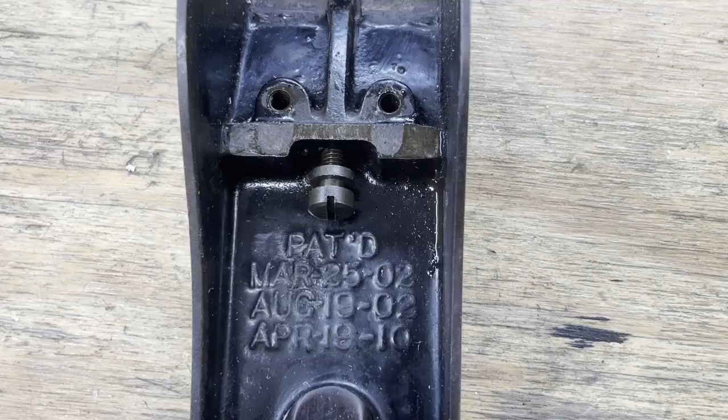But it's a Type 11 because there are 3 patent dates back here, and that narrows it down to a Type 11 or Type 12, but the 12s have the large depth adjustment knob and the high knob in the front. And those two changes came somewhere in the middle, the Type 11 to Type 12 transition.

But typically those planes would have had the V trademark back here. So again, where this is an earlier trademark, I think this is a genuine Type 11, and my suspicion is an early one. Decided to refurbish this plane, and that turned out to be quite a project. So I'm going to break this up into a series of 3 videos.

This particular video, I'm just going to do a deep dive to show you exactly what the plane is and what Stanley tools of this vintage had and didn't have. So enjoy. In the other videos, I'm going to show you how I went about completing the refurbish. And in another video, I'll focus on refurbishing and repairing the knob and the tote. So let's get to it.

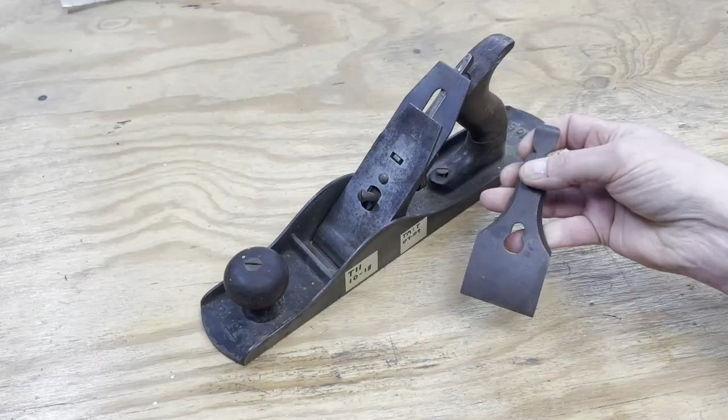So very quickly, just to take it apart, the lever cap has a fair amount of surface rust on it and an intense patina. That's going to need a little bit of oil to free it up. And the iron and chip breaker, looks like there's been a fair amount taken off of the iron, but generally they look good. And let's see if I can catch the light for you to show you that trademark. There it is, Stanley Rule and Level Company.

And inside here, the screws holding the frog down look to be in pretty good shape. The lever seems pretty snug, which is nice. And the Y yoke looks nice. But this screw has been replaced. I hope that screw didn't muck up the threads in the casting. Well, that's something I'm going to have to try to figure out how to deal with.

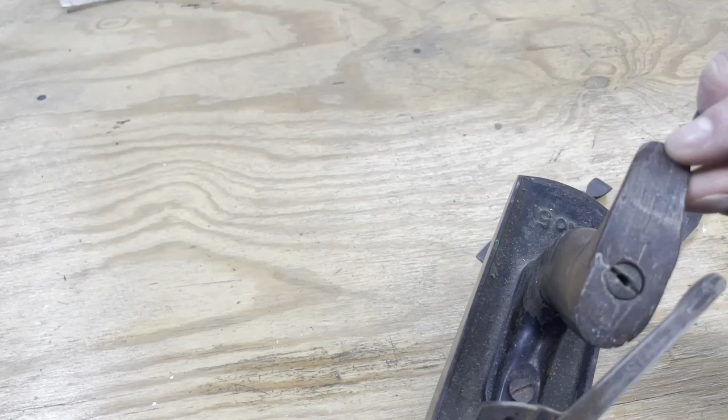And you can clearly see the tote is broken here. And there's a good chunk taken out of the horn section here. The brass nut over here looks like it's been chowdered a bit, although that one looks pretty gosh darn clean. I also noticed that the knob and the tote, I don't know how well it'll show up, but there appears to be something like a shellac or a polyurethane that's flaking off there, and you can kind of see it. And maybe it's just a discoloration, but I think I'm going to try to get that off.

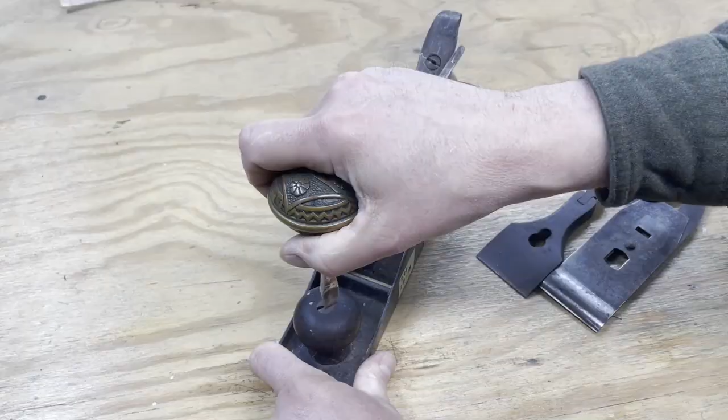And again, this particular vintage, it does have the frog adjustment mechanism and the small depth adjustment knob. All right, gonna see if we can, well, that's on there tight. Okay, very nice. Looks like this is coming loose without too much of a fight. Very nice. Oh, I'm a little surprised.

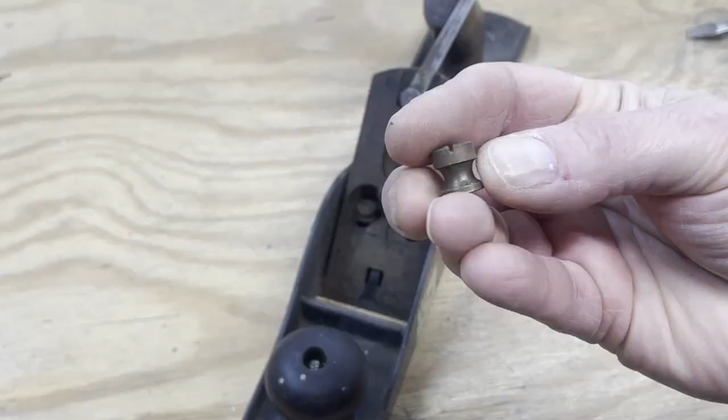This has a waist on the nut. That strikes me as a feature of a later model. And again, there's the obligatory few paint splatters, but boy, there's no cracks or checks. That's a beautiful knob. Just needs to be cleaned up a little bit. Oh, look at that. That one comes out. Very nice. And those threads look very good.

I often soak these threads before I try loosening them. But let's just see. Oh, that's nice. That wasn't very tight. And that one is pretty tight. Came loose.

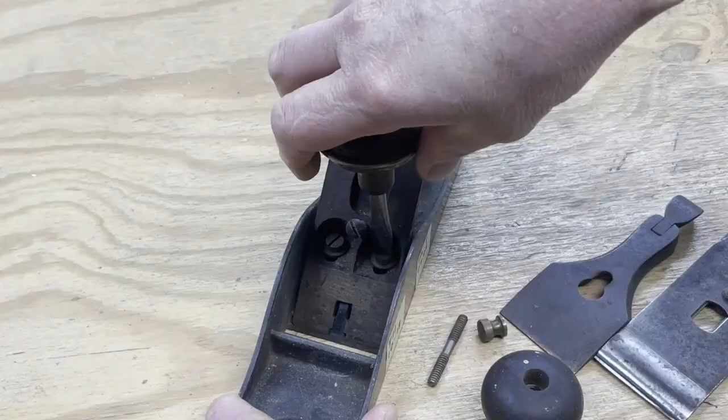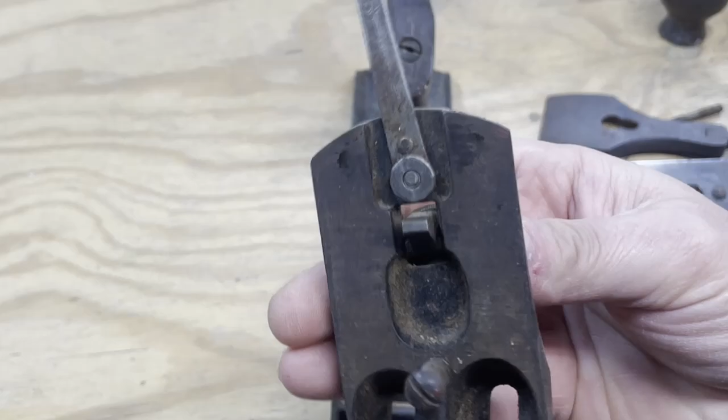Alright. Again, these two screws look pretty rusty, but no chowdering on them, which is a pleasant surprise. And a closer look at the frog. Awful lot of dust and dirt on it, but it looks as though the japanning is still up here, so that's a pleasant surprise. Yeah. This bad boy might be in better shape than I thought it was.

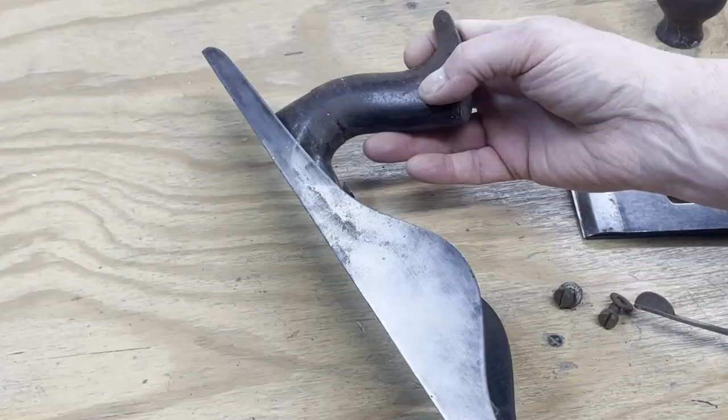Looks like somebody took some steel wool to try to shine that a little bit. And I noticed the same thing on the side of the plane. Looks like somebody gave it the obligatory steel wool cleanup, but didn't bother to get any of the dirt or grime off of the japanning.

Take the screw out, a fair amount of grime on it, a little bit of friction back here. Knob actually looks in pretty good shape. Okay. Here's the knob, looking pretty good. Yeah, it's going to take a little more work. Oh, look at that. This is a solid nut, so we don't have matching nuts on the furniture. And boy, that one's pretty chowdered up.

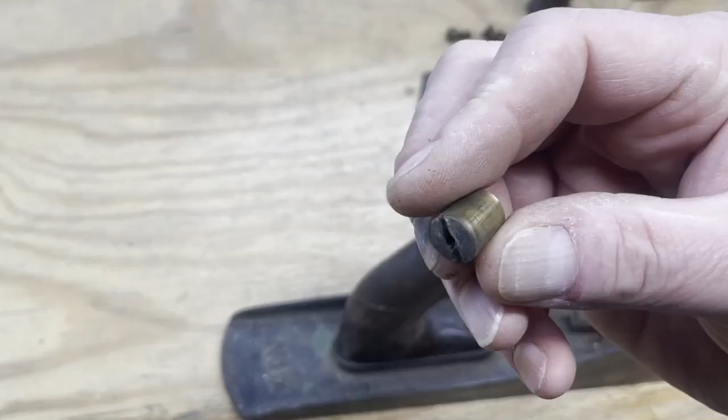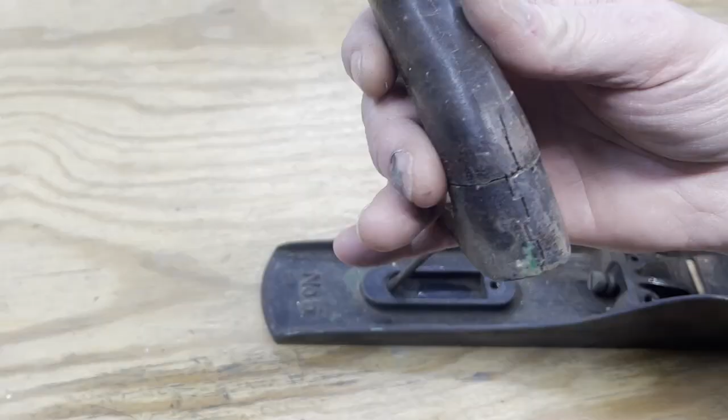Obviously not original. Oh, look at that. The tote has been glued. That's a shame. Somebody repaired it and did a pretty mediocre job. Eh. You know, it always frustrates me. You'd figure somebody who owns a hand plane would be pretty skilled when it comes to working with and repairing wood. And usually a good hardwood like rosewood breaks nice and clean. But yeah, I'll have to give that some thought.

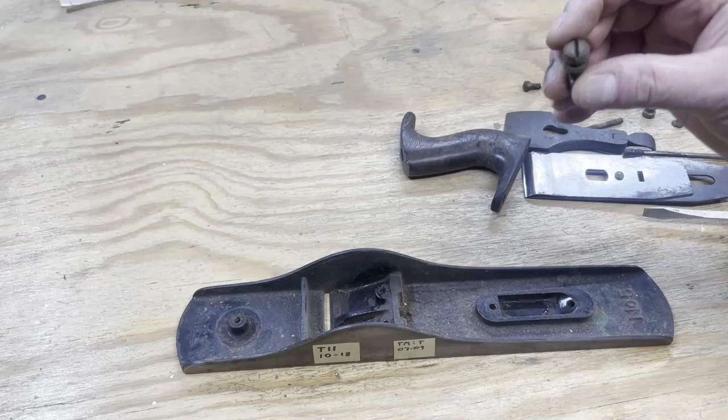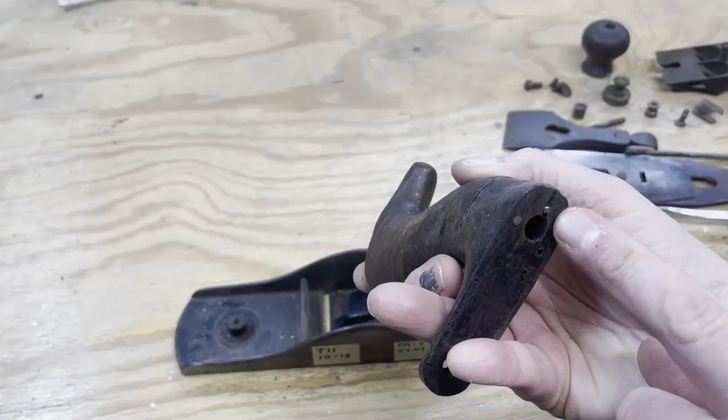Boy, that's in pretty good shape. A lot of gunk on it, but I don't see any chowdering, which is nice. Yeah, I also noticed on the bottom of the tote, looks like a couple nails and a hole there, possibly for a third nail. And on the heel of it, you can see there's some cracking as well, possibly from that nail.

It's funny, I was examining the tote here, and I have seen something I've never seen or even read about. I'm going to try to catch it on the camera, but it looks like the tote is made from two halves, a left and a right, and they are keyed together. And there's a very clear seam where it's low here, high here, low. So kind of a tooth pattern where one nests into the other.

And you can also see a line here. It goes across and it dips down, comes over, dips back up, back over. And the same sawtooth pattern on the back, and you can really see it here where it delaminated. However, I don't see any evidence of it on the bottom. And this doesn't feel overly heavy. Doesn't quite feel like rosewood to me. Not quite heavy enough, but maybe it was a less dense piece of the tree.

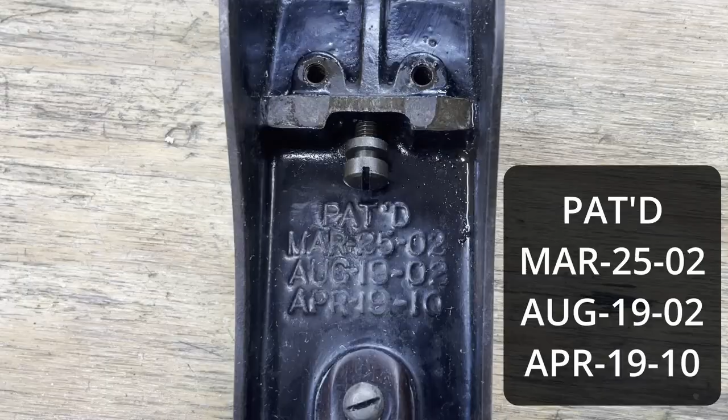And here's a close-up of the lettering behind the frog. It says patented, that's P-A-T apostrophe D, March 25th, '02, August 19th, '02, and April 19th, '10. Now let's just take a couple minutes to take a look at what these patents were all about.

This is the one patented March 25th, 1902 by H. Richards. And it's a pretty long patent. It's like six pages. Fairly difficult to read, in my opinion. I'll give you the nickel tour of what it means. At the beginning of the patent, he describes that one of the challenges in manufacturing a hand plane is that you want the body of the plane, the sole, to be made of relatively thin cast iron so that it stays rigid and it's not overly heavy.

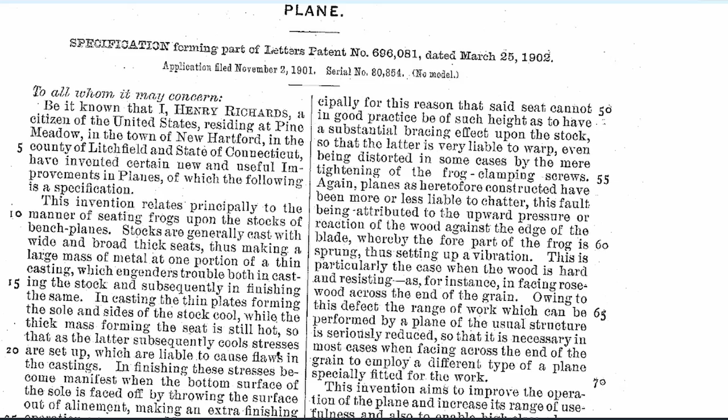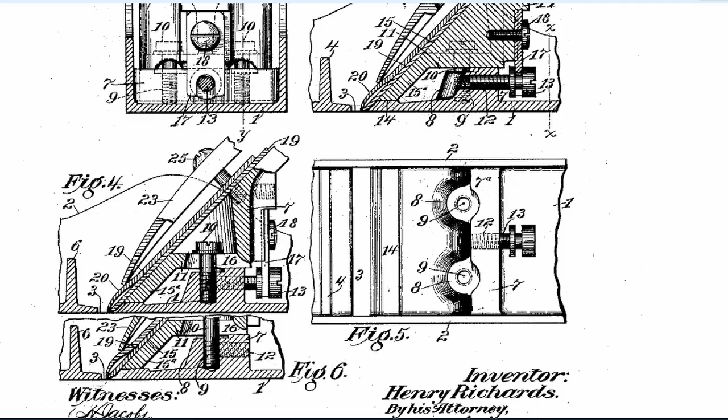But you need the frog seat to be relatively beefy so that you can get some screws into it. And part of the challenge in manufacturing is that the really thin sole will cool at one rate, while the beefy frog seat, having a fair amount of mass, cools slower, and it can create thermal stresses. And when you go to finish the body, so he describes, you can run into problems. So he came up with an idea to create a frog seat that gives you the benefits of a thick and beefy frog seat, but doesn't have the mass, and hence the challenges of finishing it and thermal issues.

And there's a few diagrams here, but I think these two down here, figures 4 and 5, kind of give you the idea of everything he's talking about. Let's check out figure 5. This is the top view. So there's a few things to notice. First of all, you don't have a big beefy frog seat.

You've got this shelf sort of in the back, or a truss or a rib that's number 7. And 7 stands a little bit proud. He's got it labeled 7A here, of the two bosses for the screws. The two screw bosses sit a little bit below the level of 7. And then out in the front here, there's another platform that he labels number 14.

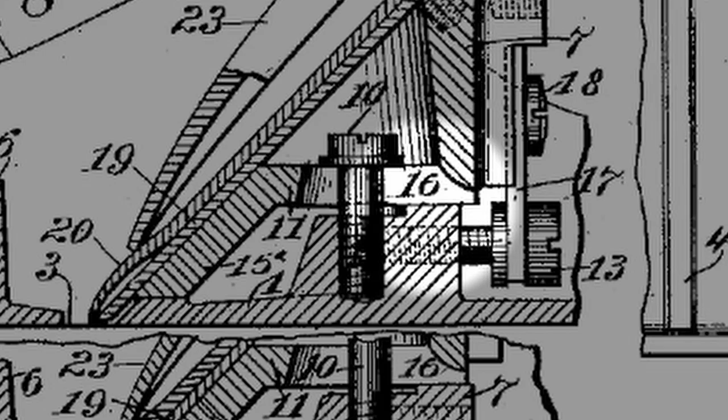And over here in figure 4, you can see it's got the seat, but the front of the frog, the 2 feet in the front, rest on the front platform. And then the back of 7 here, you can see there's that little relief where the screws are. So as you clamp down on the screws, it really pulls down tight on the frog and gives you good seating back here at 7A and back up here where the front of the frog meets 14.

And this platform 7 and 14 are milled parallel to the sole, and the surfaces of the frog are also parallel, so that as you slide the frog forward, closing the mouth, it all stays parallel. And I think that's a reference to the older bedrocks that had a sloped bed, and as you slid the frog forward, the iron would plunge necessarily a little deeper.

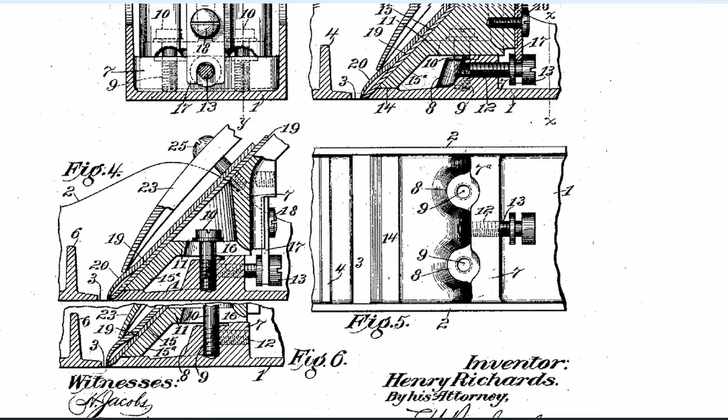He also spends a little bit of time talking about an improvement in the cam lever, but that's only a couple paragraphs of the 6 pages. And from what I gather his idea was to put a flat on the back of the cam, so that as you rotate this cam and engage the cap iron, it hits the flat, and that flat causes it to stay locked.

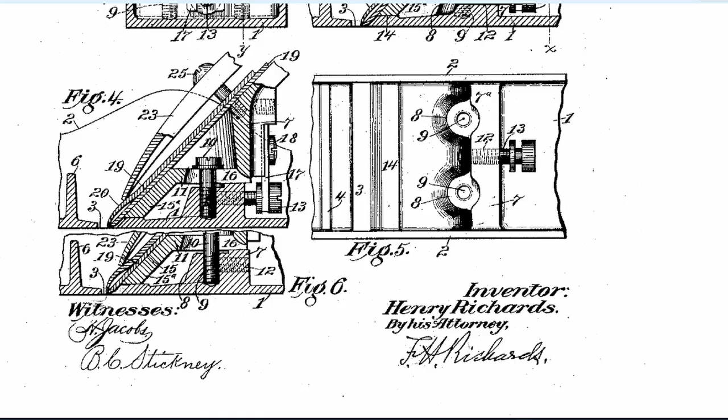This patent claims that another advantage to having this platform 14 is that it makes the body of the plane a little bit thicker and beefier right at the rear of the mouth. Traditionally on older planes, this was very, very thin cast iron and very weak and subject to chipping. So that's the essence of this patent, and if you're interested you can read it, but I'll scan down through it, and like I say, I found it to be, in my opinion, excessively wordy. So that's what we got for this one.

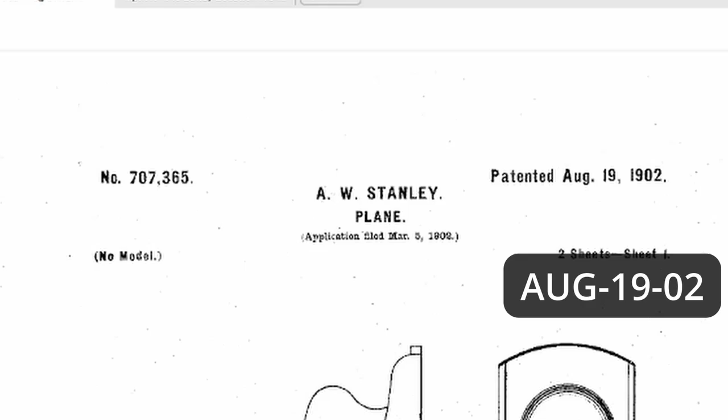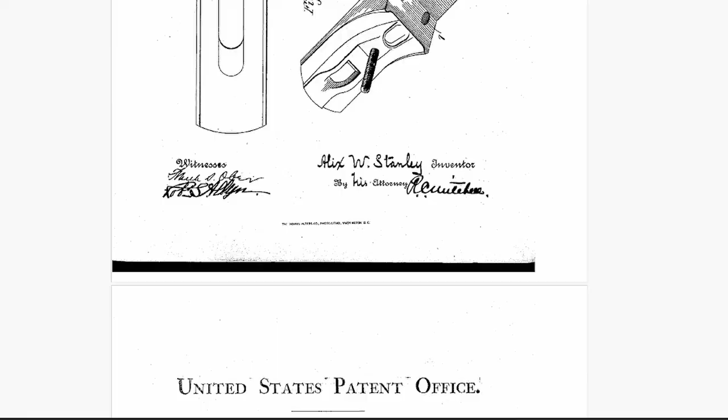Okay, the patent with the date of August 19th, 1902 is from a guy, coincidentally, named A.W. Stanley. I have no idea if there's any relation. But this patent is for a rib that sits in the frog seat. And this rib, if you read the patent, is made basically to stiffen the area of the plane body where the frog seat is. And I can only imagine after the previous patents of trying to make it extra thin, maybe they decided adding a rib for strength was a good idea.

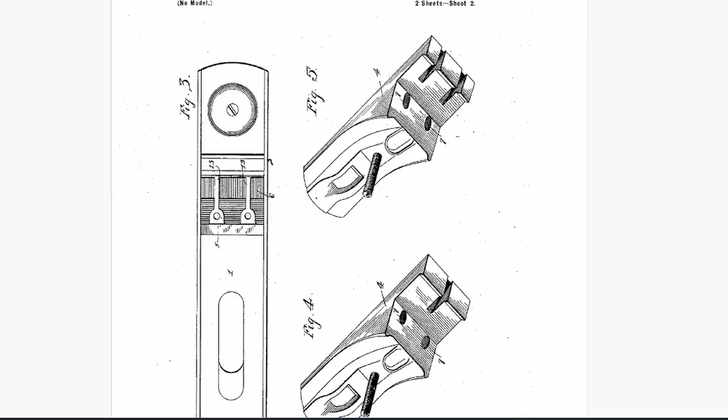And here you can see in the top diagrams he's showing 2 ribs and 2 slots in the frog. But in practice they just went with the 1 rib, as we all know. So this one's pretty straightforward. Ironically, they don't talk about this central rib and slot acting to help locate the frog, and that's a little foreshadowing because that has to do with the next patent that came about 8 years later.

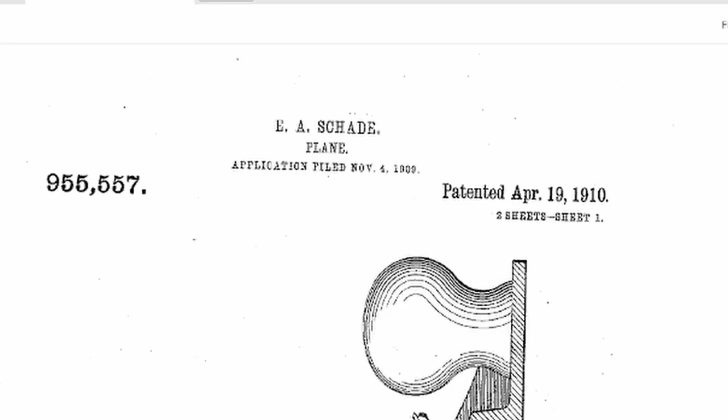And here we are on that one, on the patent that's dated April 19th, 1910. That's exactly what they're talking about, using that center rib to help locate the frog. This is a patent by E.A. Schade. And if you read down into it, it's pretty straightforward, but he just describes, you put a very accurately milled slot in the frog and an accurately milled rib in the frog seat.

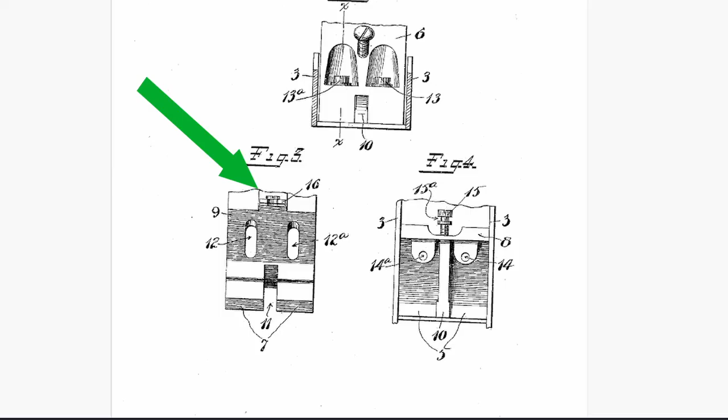And he also comes up with a way to add some sort of fine-tuning adjustment to the frog that seats in the frog adjustment screw. So with these improvements, if you remove the frog and you put it back in, it should land almost exactly where you took it out, and that's the point of this patent. And there it is. Well, that's all I got for this one.